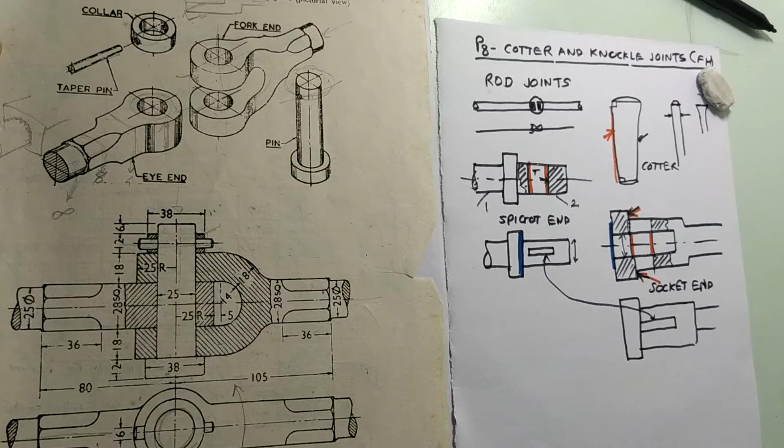Okay, so we have described this assembly in the isometric view, how these parts are assembled. There is a sectional view also available here. You can see all the parts which are shown earlier, they are assembled, and a sectional front view and top view is drawn here.

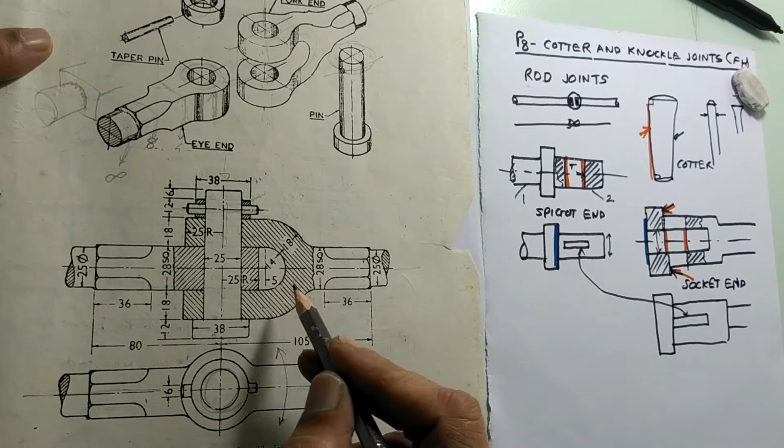So if you follow the parts, this is on the right side, there was a fork end which was having two sides like this. So the end of the rod was modified in the form of a fork, which you can see here. This is a cylindrical end, then octagonal end, octagonal end, then the square end, then the square shape, which is of size 28.

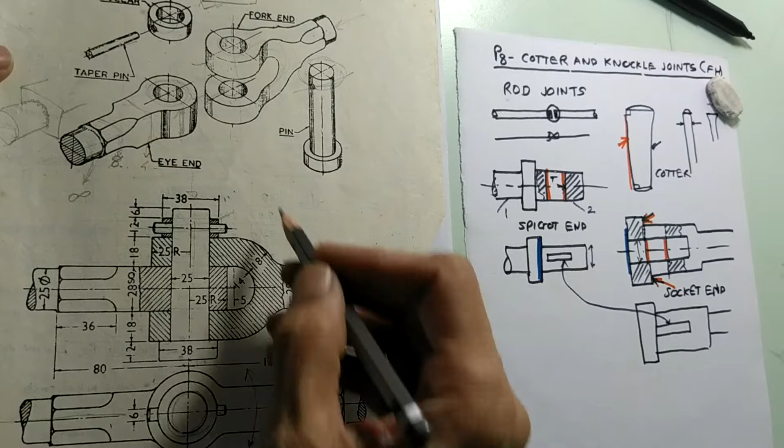Then the rod is modified into a fork, two sides. So two sides fork. After that there are holes. So this is one hole, this is another hole on the two sides.

Then the space between these two ends of the fork is equal to 28 mm, and this single eye end which is there, which has also got a thickness of 28 mm. So this 28 mm exactly occupies the space between these two ends of the fork.

So this is the rod on the left side, that is a single eye end, single eye end, fork end, and then these three holes which are aligned, one here and one here. The size of the hole is 25 mm.

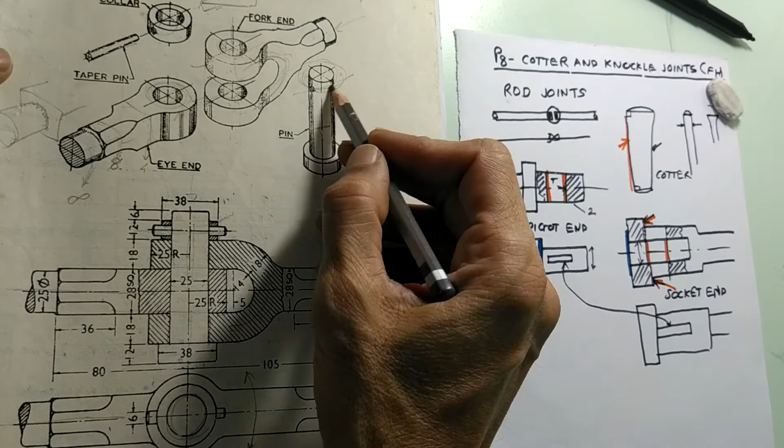There is a pin of size 25 mm diameter. This pin is going from below. The head of the pin touches here. The remaining part, this part of the pin comes out from the other side, and this part which comes out from the other side, it is covered by a collar, and this collar has got one hole, small hole.

This small hole matches with the hole which is there to the pin, and through these two holes this taper pin is passed from here and then from here. So taper pin goes like this, and as a result a joint is formed.

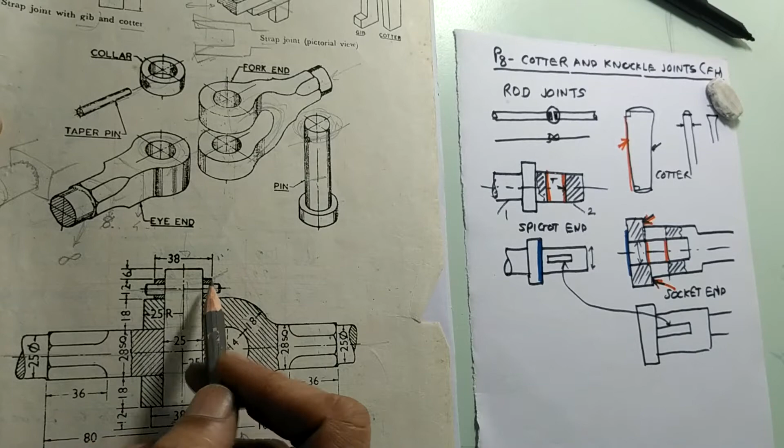You can show this pin like this also, and then you can show partial section for this end of the pin. The rest of the pin need not be shown in section, so that you can show the pin full, going inside through the collar and through the main pin.

So this taper pin is put like this. Now this main pin will not come out unless and until you remove this taper pin. So the joint is formed.

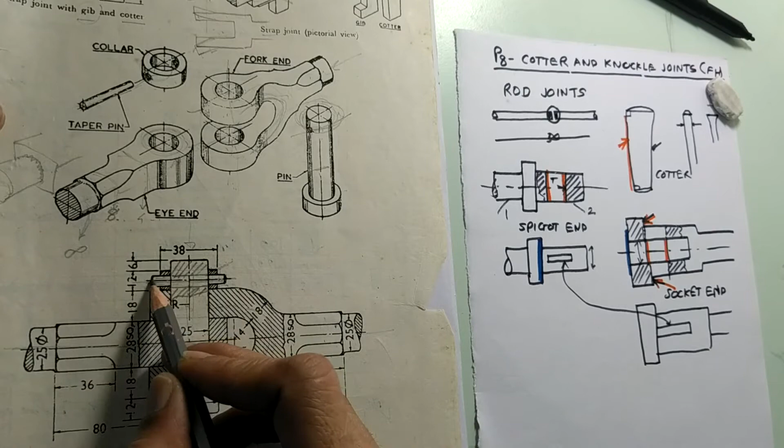Now this joint is formed with a pin which is cylindrical. So as a result, this will have a circular motion. So if you see with respect to this single eye end, this double eye end or the fork, it can swing like this. It can swing like this.

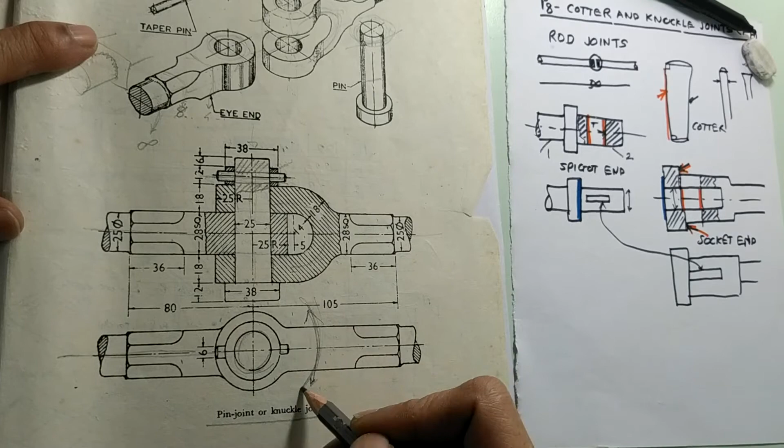So there is a joint, but still there is a movement possible, and this movement is like this. So curvature or arc kind of movement is possible. So one part is like this, and the other part it can swing like this. There is a joint here, there is a pin put from here, but it can still swing. Something like a hinge of a door, it can form.

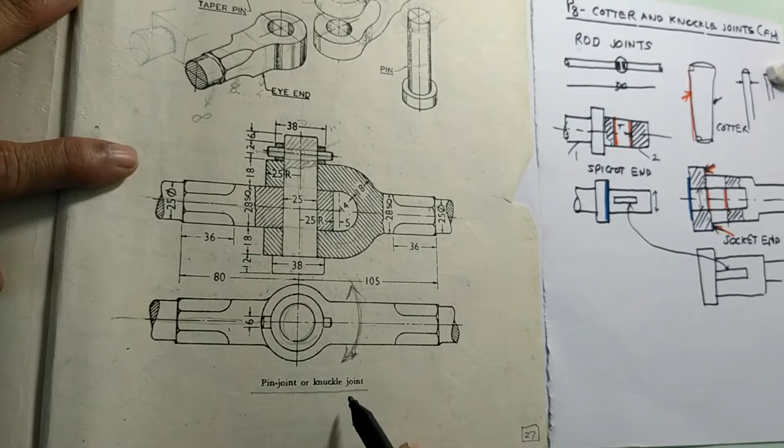So this is a pin joint, or it is also called as a knuckle joint. This is called as a knuckle pin, and it is cylindrical in shape. So we have discussed now two types of rod joints. Earlier was a cotter joint, now this is a knuckle joint.

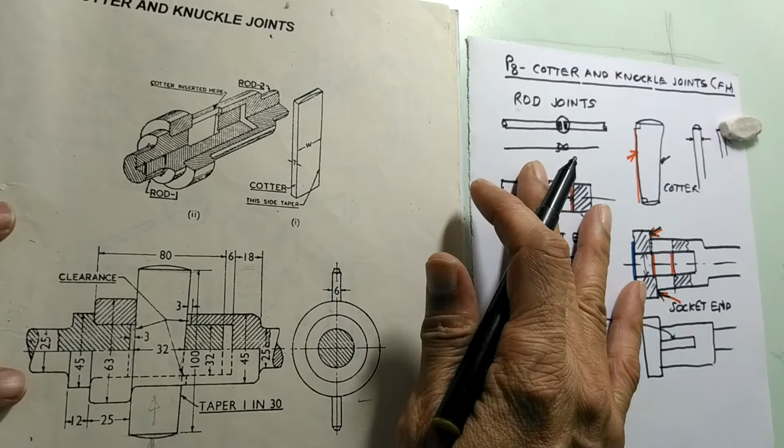In knuckle joint there is a rotation which is possible because of the cylindrical pin, and in case of a cotter joint there is no rotation possible, because in case of cotter joint, the cotter pin has a rectangular section. So there is no rotation possible, and the cotter pin normally works because of the taper, and it is hammered from one side. There are different designs as we have seen.

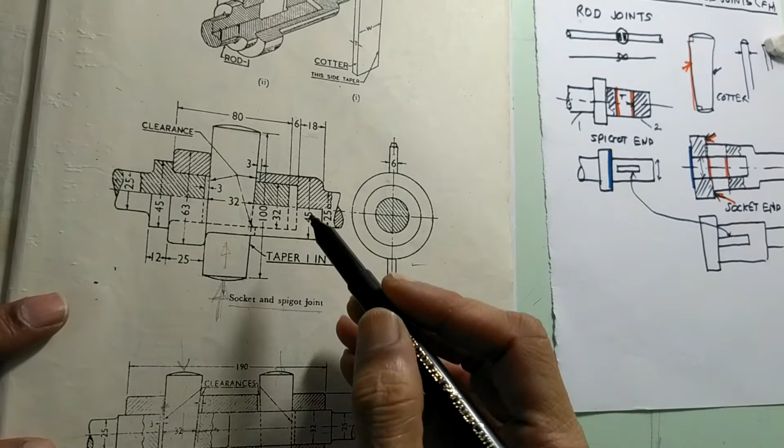Socket and spigot joint was like this, whereas there is a sleeve joint, cotter joint with a sleeve, where there are two cotters used, and there is no spigot and socket kind of modification given to the ends.

Then there was the third type, which was using a gib along with the cotter. The gib's function was to provide a taper on the gib and cotter, and you don't have to provide a taper to the socket and spigot here.

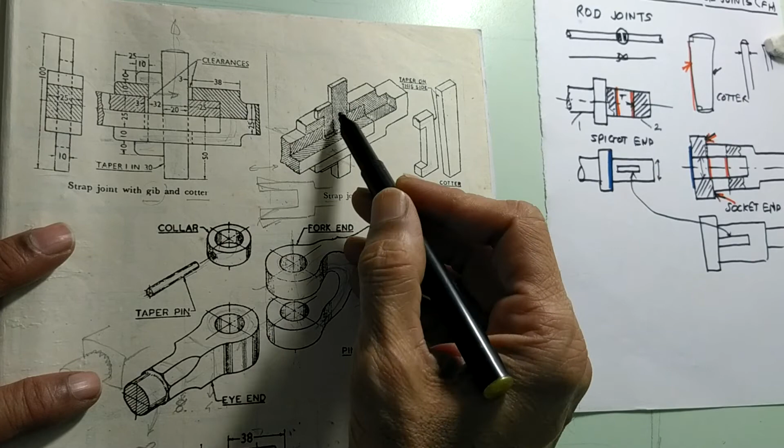Moreover, this joint, called a strap joint, is open from the sides, and this joint is covered by a gib head, so that the two heads of the gib prevent the fork from opening. That is what we have seen.

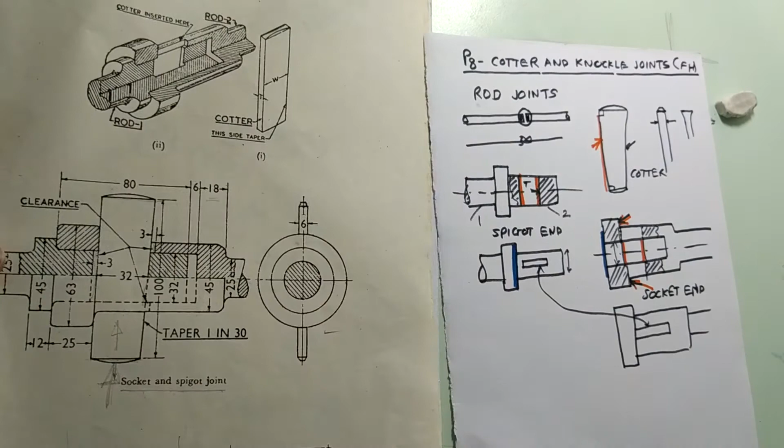So we have learned three types of cotter joints and one knuckle joint in this particular practice sheet. We are preparing this practice sheet as P8, practice sheet number 8, cotter and knuckle joint. It is freehand work, and we have to draw all that is shown on these two pages. This is one page and this is the second page. So whatever is shown, that all we have to draw as freehand work. So this is practice sheet number 8, which is what we have learned.